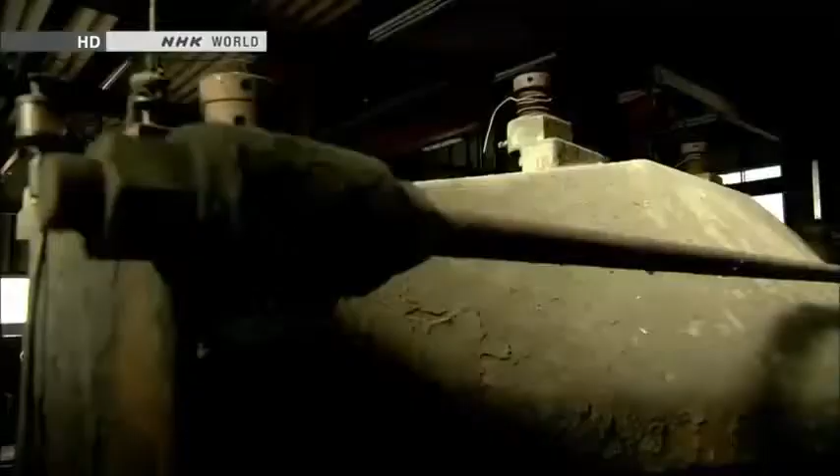In a workshop near Mount Fuji, a curious being has appeared. It's 3.8 meters tall and weighs 4 tons. It is a giant humanoid robot named Kuratas.

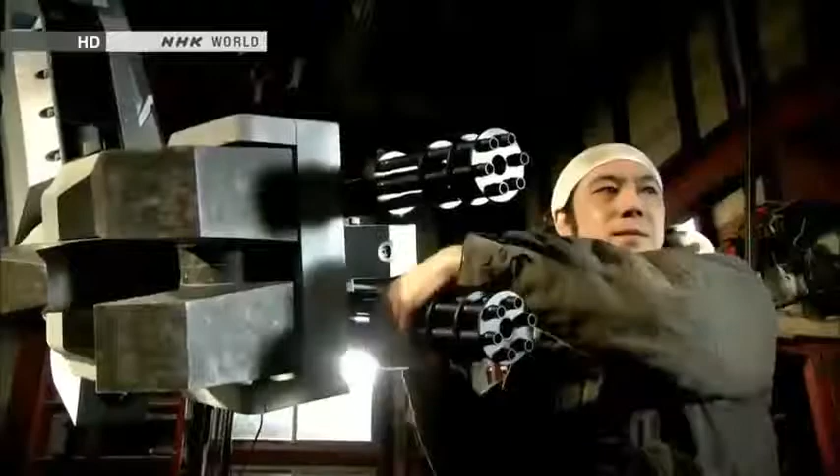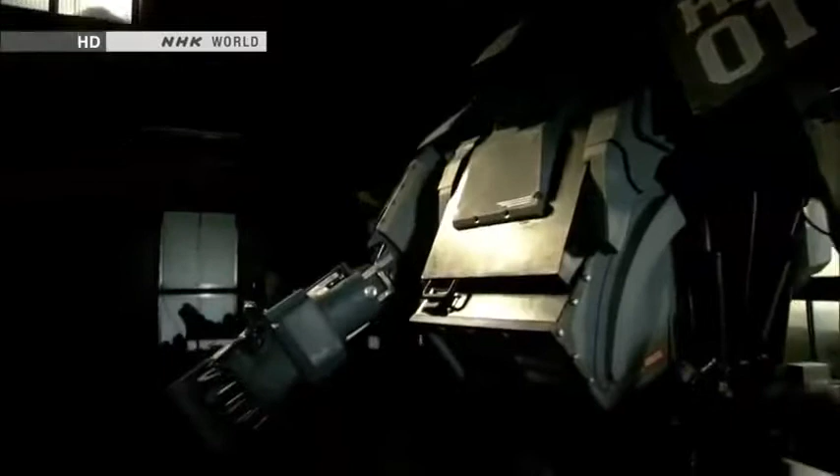Kuratas is a contemporary artist's creation. He holed up here for 2 years, building the robot with input from an expert. He calls Kuratas a work of art, but it's a sophisticated piece of machinery. A person seated inside can control the robot, move its limbs, and grab things. The artist says he was inspired by robots in science fiction tales and animation. That vision sustained him as he worked in solitude.

Things that were once unthinkable are becoming real. How will robots evolve? Well, military applications could be one option. They'll probably become more and more like humans. They could surpass us in strength and ability.

People long dreamed of creating these extreme machines. Now, humanoid robots are here. They think like we do, move like we do, and even sacrifice themselves for us.

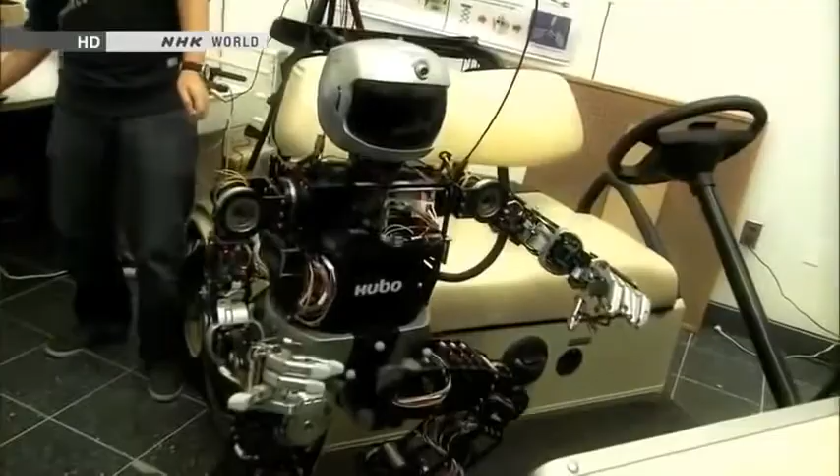We want our robot to change society, because robots must be useful. Electronics and computing, progress in vision systems, there's many pieces of it. We will see much more capability continue to grow.

Since the Industrial Revolution, people have entrusted some jobs to machines. But there may come a day when humanoid robots do much more complex jobs. Then, what will people do?

You'll see more and more robots doing things in society, whether it's manufacturing or service applications or home healthcare applications. The key will be to skillfully divide labor between humans and humanoid robots.

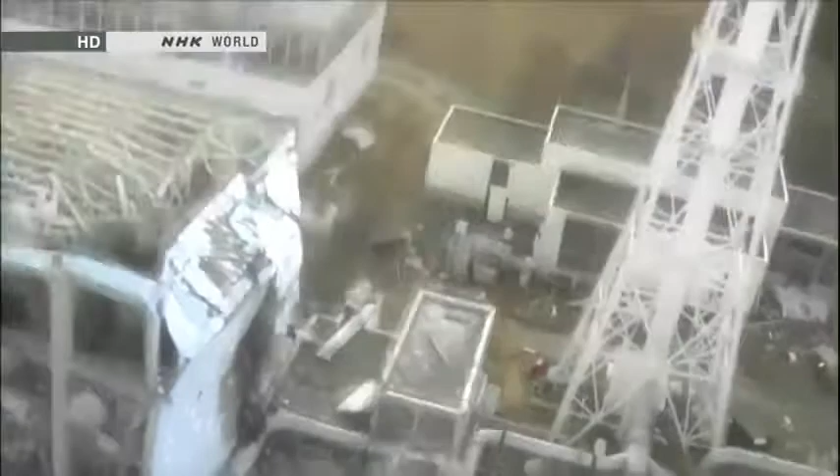The disaster that hit Japan in March 2011 accelerated efforts to develop robots with human traits. The Fukushima nuclear accident left people powerless.

Robots can take over when things become dangerous. They can plow through rubble, climb ladders, even make repairs. People are turning to humanoid robots to handle all of these tasks.

We're eager to launch it soon to end the crisis. By joining forces, we can make a truly useful contribution. Only a humanoid could do it.

The day will come when robots will really assist mankind. The nuclear disaster in Japan sparked explosive advances in humanoids at the front line of robotics development. This program explores the future that's fast approaching.

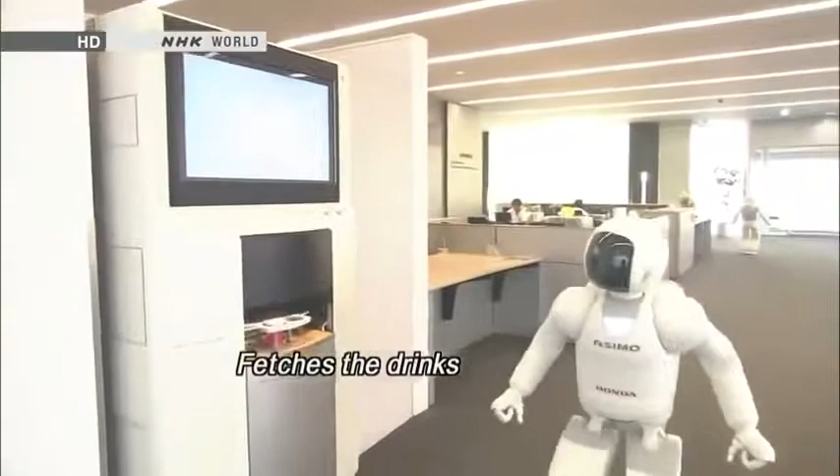ASIMO was created by Honda's research and development subsidiary. We were allowed to film their top-secret robotics laboratory.

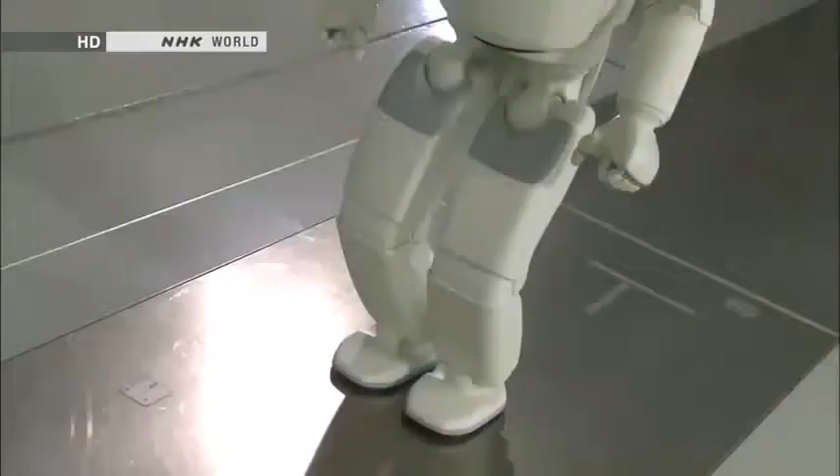Japan is a worldwide leader in the development of humanoid robots. ASIMO is the country's crowning achievement. Engineers continue to make improvements.

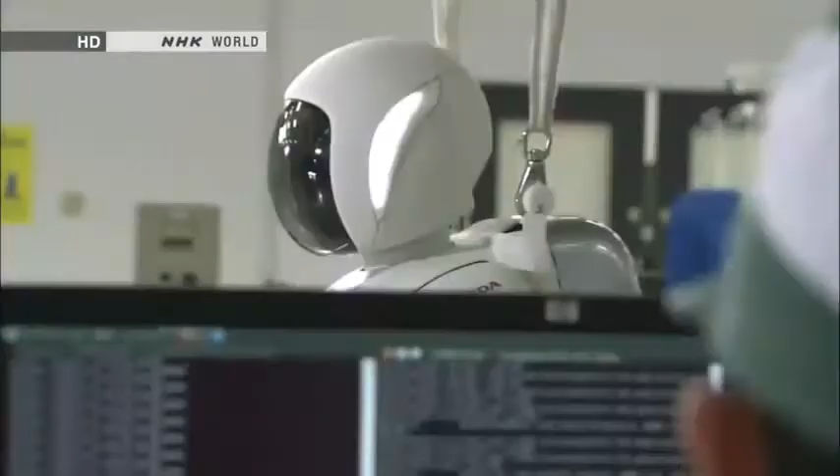ASIMO's most innovative feature is its advanced intelligence. The robot can think and act on its own without human intervention. That's made possible by sensors that replicate our 5 senses.

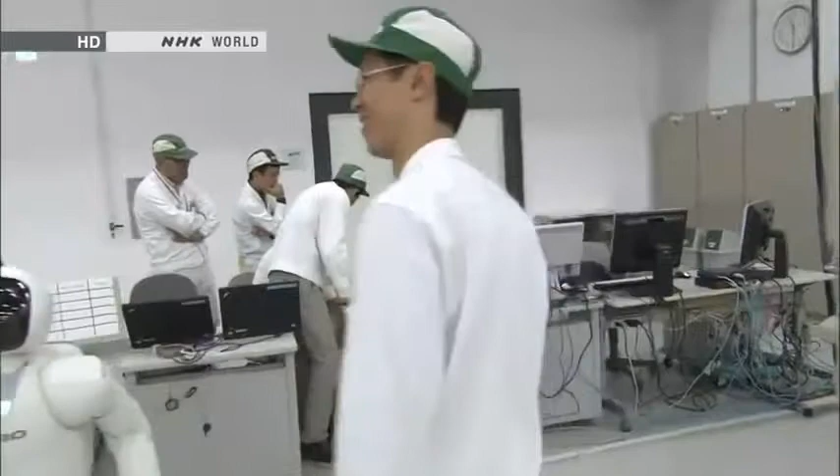ASIMO's head contains 8 microphones. It uses them to listen and engage in conversation. 2 cameras work as eyes. They can detect humans and use stored data to identify them.

A facial recognition problem? I don't think so. Please cover your face.

ASIMO's artificial intelligence analyzes a vast array of information. That's how it understands people's requests and takes appropriate actions.

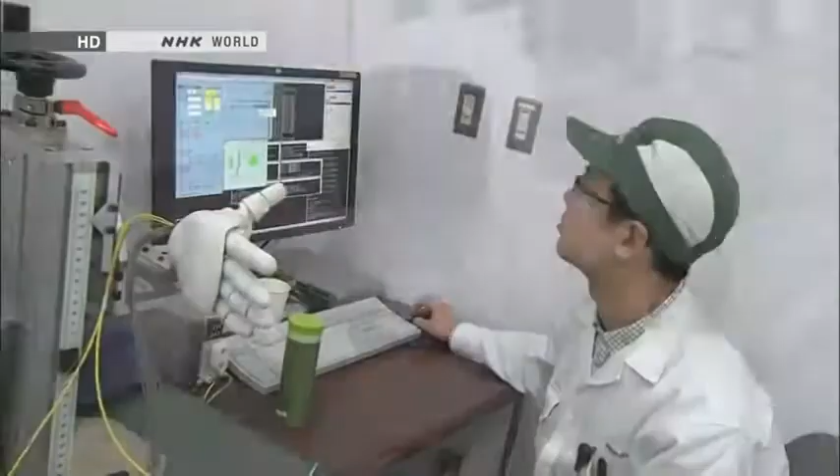ASIMO also has a sophisticated sense of touch. Its fingers can make subtle movements like a person's. Sensors are embedded in the fingertips too. They can gauge the hardness of an object, like human fingers do.

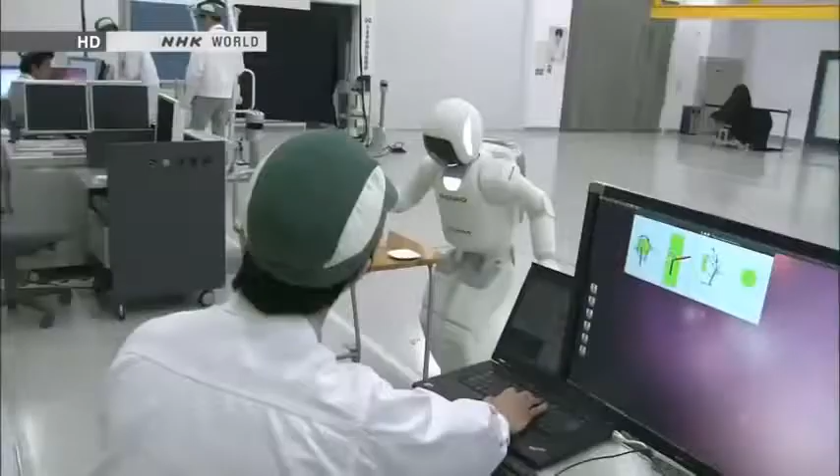Most robots use a fixed amount of strength to grab things. But ASIMO exerts more power to open a tightly sealed water bottle and less when holding a paper cup. Its artificial intelligence uses information from the fingertip sensors to adjust the grip.

The developer's ultimate goal is for ASIMO to be a valuable partner that coexists with humans. The engineers who created ASIMO all grew up watching animated shows about robots, such as Astro Boy, Doraemon, and Gundam. They dreamed of someday making their own.

Satoshi Shigemi is the development team's leader. He has been designing robots for the past 16 years.

From the beginning, we wanted to design a robot that could help people. To realize that dream, we're constantly asking ourselves, what kind of robot would be able to change society, make people happy, and make life easier for people around the world? Our idea is to create a robot that will change how people live. We're working through the technological issues, one by one, in order to reach that goal.

ASIMO's advanced physical capabilities are revolutionary. The robot can walk and run. It can reach speeds of up to 9 kilometers an hour.

For robots, walking is much easier than running. When running, both feet momentarily leave the ground. Balancing in mid-air is no easy task.

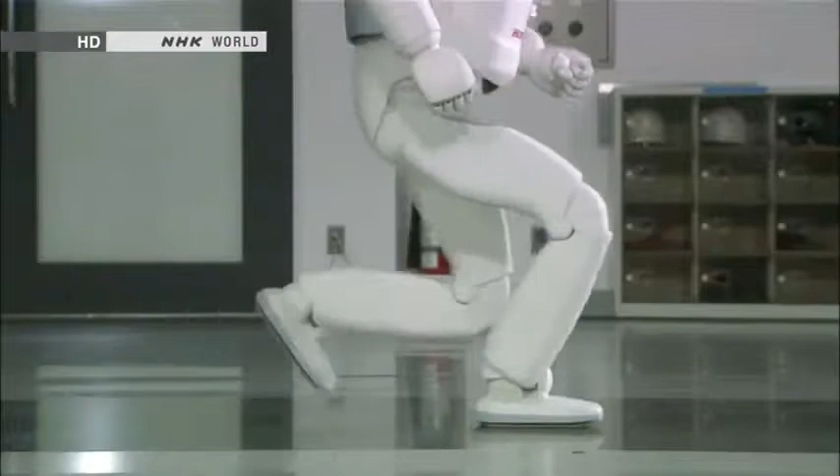Maintaining posture while jumping or floating in the air was a major technological breakthrough. ASIMO leans its upper body slightly forward to maintain overall balance. It goes forward straight in the air.

Sensors in ASIMO's waist measure the robot's angle. It leans slightly to compensate, forward or back, side to side. That's how it stays perfectly balanced in the air.

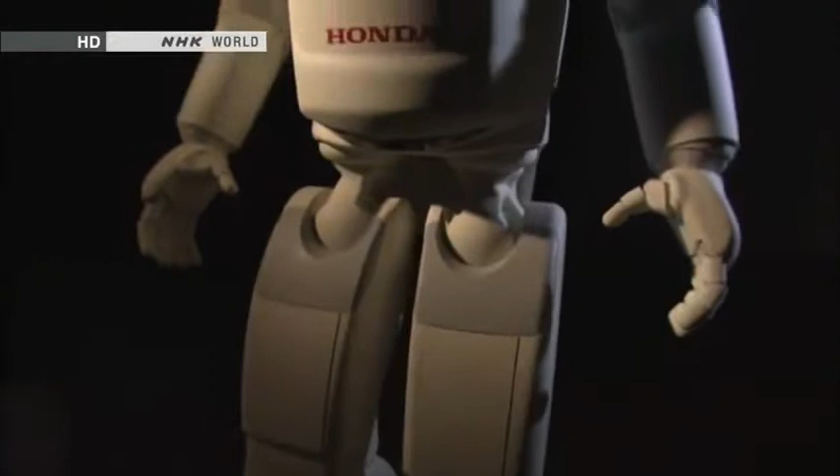ASIMO has been evolving ever since development began in 1986, much like a growing child. But something happened that made researchers realize ASIMO's real-world limitations: the accident at Tokyo Electric Power Company's Fukushima Daiichi nuclear plant. The damaged reactors released radioactive substances, making it difficult for humans to deal with the crisis. People needed something that could confront the dangers and bring the plant under control.

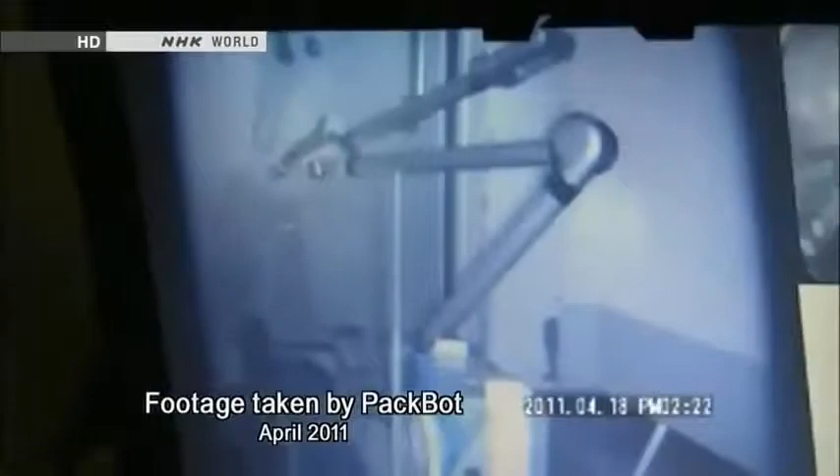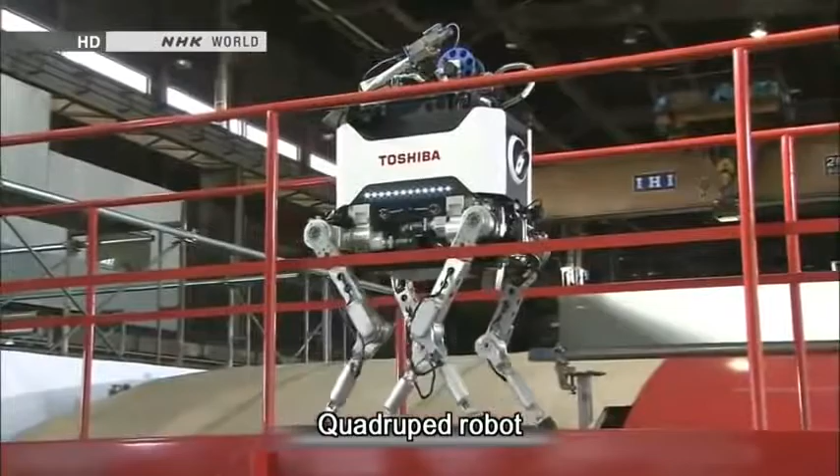Robots. Japanese officials sent a request for robots developed by the U.S. military. The robots were sent to Fukushima in April 2011. They recorded images inside the damaged reactors. Since then, a variety of Japanese robots have been enlisted as well. Robots have proven to be useful, but 2 years after the accident, they're only used for inspections. They're not able to do all the work of humans.

What about ASIMO? Right after the disaster, people flooded Honda with phone calls and emails asking the company to send ASIMO to the Fukushima plant. But ASIMO wasn't up to the task. It could move nimbly over an office floor and other flat surfaces, but large vertical gaps and obstacles were a different story.

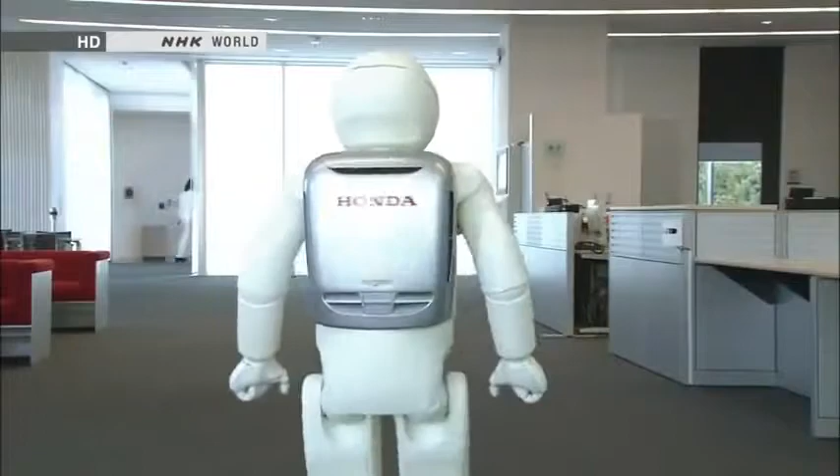We heard from many customers. We ourselves regretted that ASIMO couldn't be of help. It was obvious that the ASIMO we had built wasn't ready for real-life action. We realized right away that we needed to make something different, something new that could offer immediate assistance.

Honda wasted no time. Company officials offered to create a robot free of charge to assist TEPCO in the recovery. TEPCO accepted. Officials asked for a robot that could open or close valves inside the nuclear plant. We wanted to flush out radioactive materials that remained inside the pipes and bring down radiation levels in the facility. That was our first goal. Unless we opened or closed the valves, the area would remain highly radioactive, and that would prevent workers from entering the facility, and impact the entire decommissioning schedule.

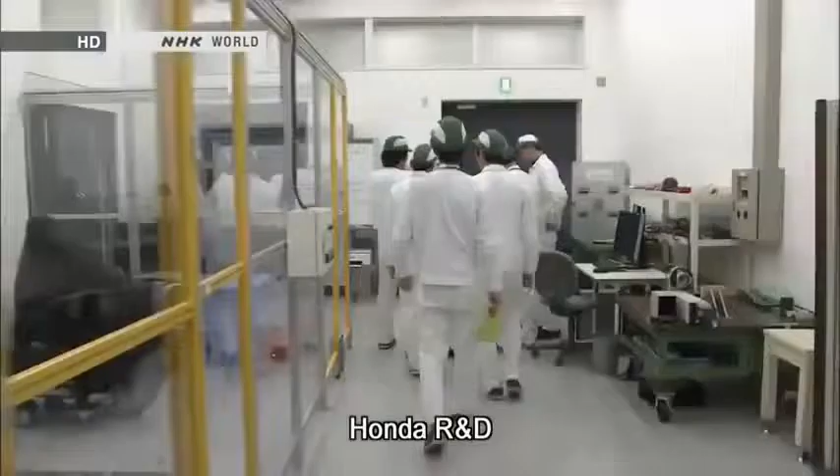How many valves are there? Each unit has from several thousand to tens of thousands of them. In July 2011, 4 months after the accident, Honda began designing a robot for use at the nuclear plant. Members of the ASIMO team were put in charge of the project. A humanoid robot would take too long to build, so engineers focused on making a robot specifically for operating valves.

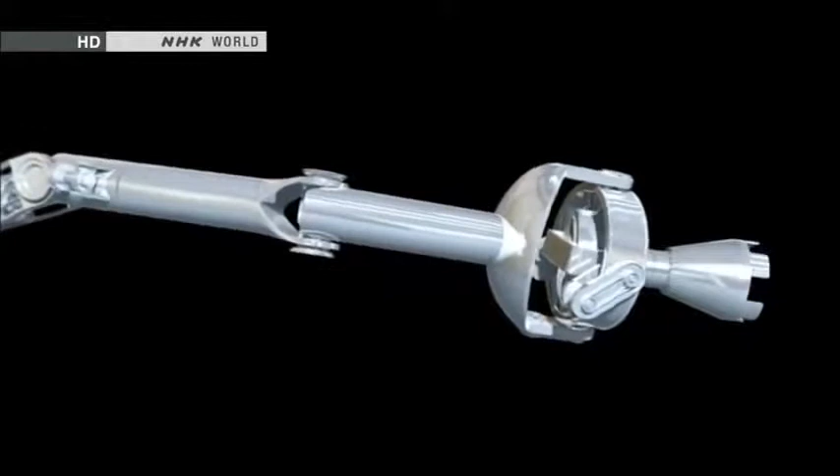ASIMO was crucial to their efforts. Its ankles employ advanced balancing technology. Developers reasoned that using it would allow the new robot to work inside rubble-filled reactor buildings. The team worked exceptionally fast, completing a prototype in just 4 months. They turned ASIMO's leg into an arm for operating the valves. Even when the base moves, the arm remains steady.

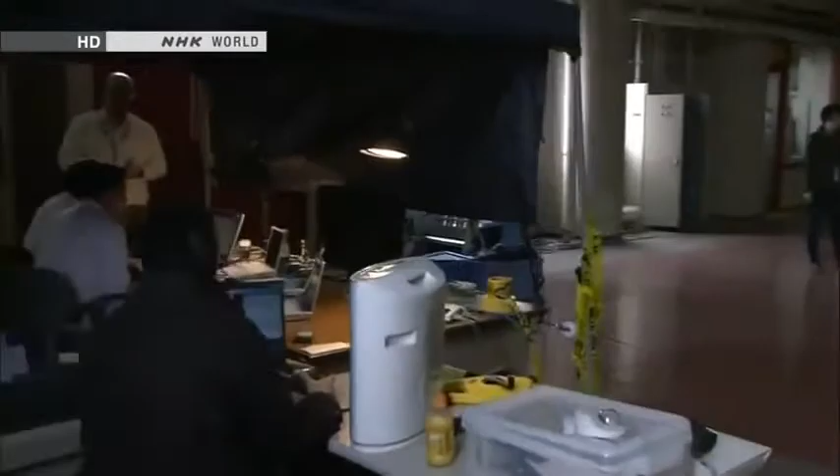So far, so good. Officials from TEPCO evaluated the prototype at the National Institute of Advanced Industrial Science and Technology. The government-backed group for cutting-edge research contributed to the development effort. A TEPCO official couldn't take his eyes off the robot's movements. We may be quite demanding. That's okay. We might be quite direct. The test is designed to replicate conditions inside the nuclear plant.

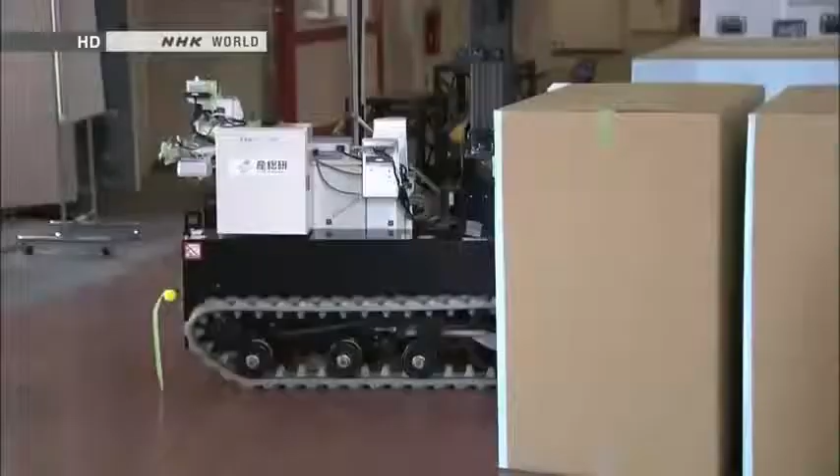The robotic arm is remote controlled. Testers send the arm toward one of the valves. There are a number of unknowns, including the condition of the valves—they may have rusted since the accident. A valve might break if the robot applies too much force, or it might not budge at all. The robot uses just the right amount of force and turns the valve on the first try. It's passed the test.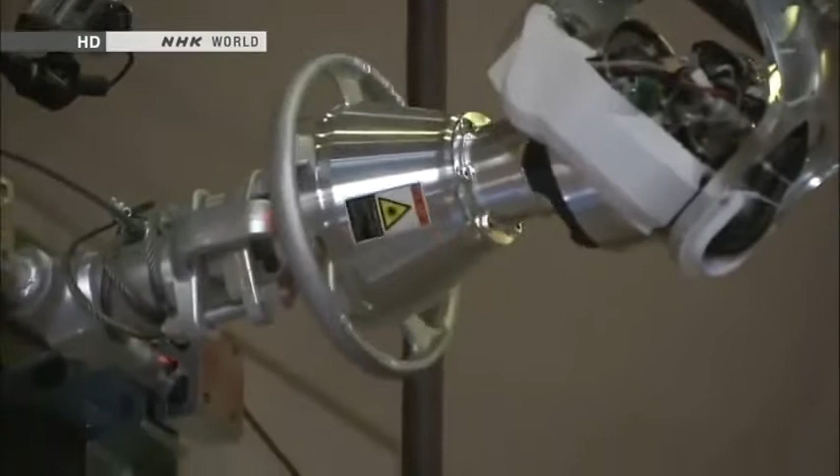This robot can do more than inspections. It could help in the recovery effort. From what we've seen, the robot seems near perfect. We want to use it as soon as the need arises. It's important that we quickly do what we can to make that possible.

The Fukushima accident also encouraged U.S. developers to design emergency response robots. Department of Defense officials have spearheaded the effort. Before, they had shown little interest in humanoid robots. Now, they view them as vital for disaster response. The architect of the new strategy is Gil Pratt of DARPA. He oversees funding for leading-edge research at the Department of Defense.

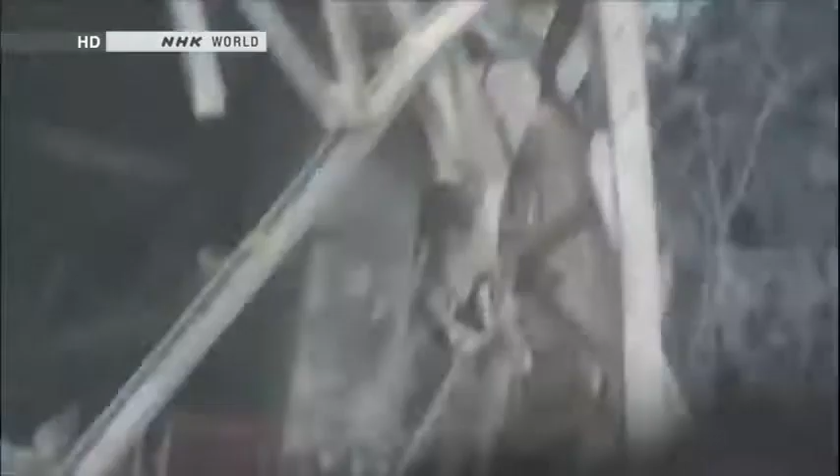There are many aspects of disaster response in Fukushima that inspire people in robotics to work on new capabilities. If they were able to take action during those first 24 hours, then the first reactor maybe would not have blown up in an environment that is too dangerous for a person to do.

What's important to us is that the robot is compatible with human environments, compatible with human tools, and also compatible with human operators without special training. As a result of that, the easiest form that comes to mind is the human form.

DARPA is backing the development of a humanoid robot for catastrophes, such as nuclear power plant accidents. This company is leading the development work. It has already built several military robots. Okay, I'll show you the current status of the robot.

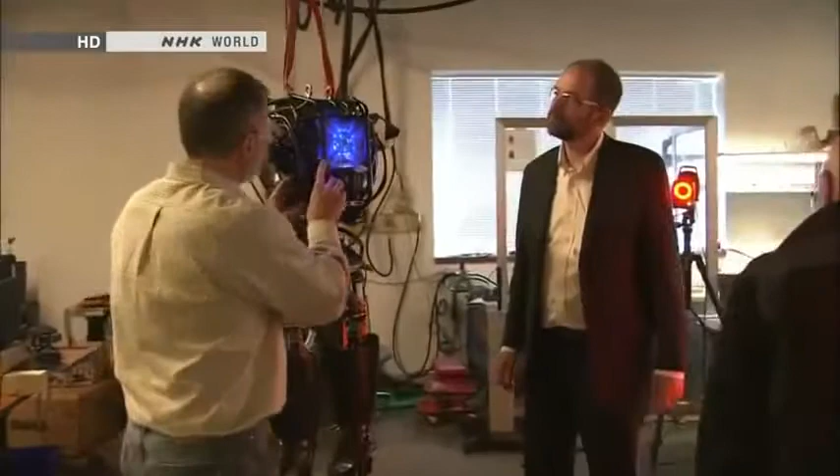This is the first American-made humanoid robot for disaster response. It's called Atlas. Before, U.S. designers had focused on robots with specialized functions.

Why the sudden interest in humanoid robots? Traveling over debris, prying open valves, using tools for repairs - performing multiple tasks like these is impossible for specialized robots. Crises also require robots that can navigate doors and stairs. Humanoid robots are ideally suited for such situations.

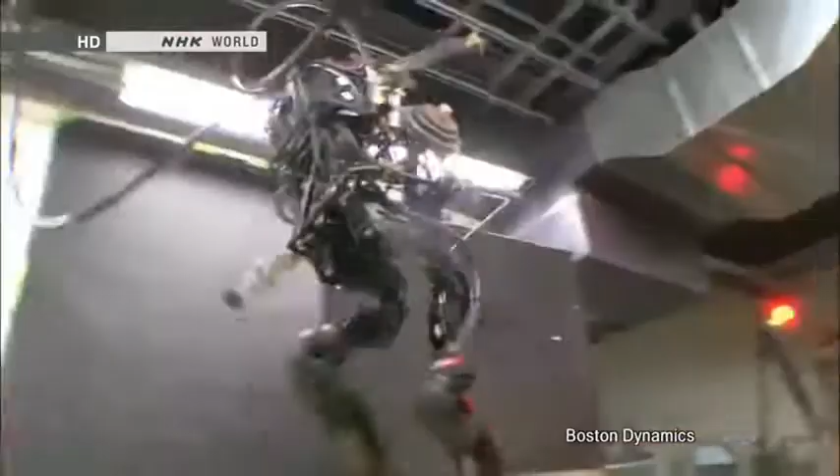Tests of this prototype were going smoothly. It can easily climb stairs and jump from a height of nearly 1 meter, and can negotiate obstacles using its arms and legs. It can already handle more demanding environments than Asimo can.

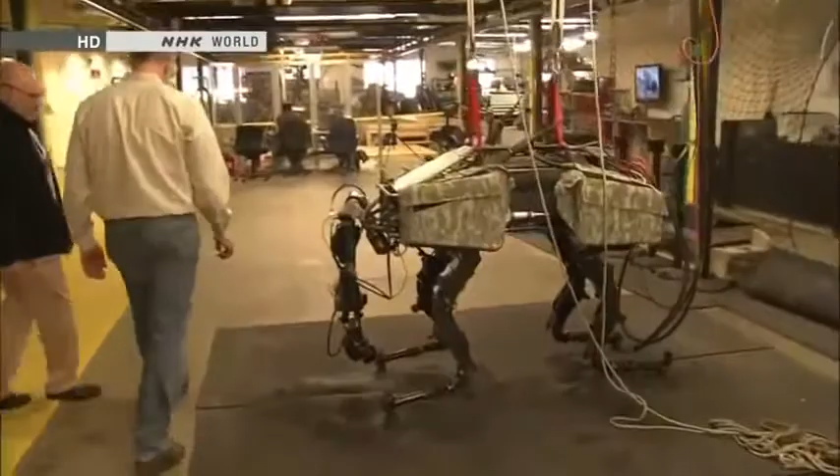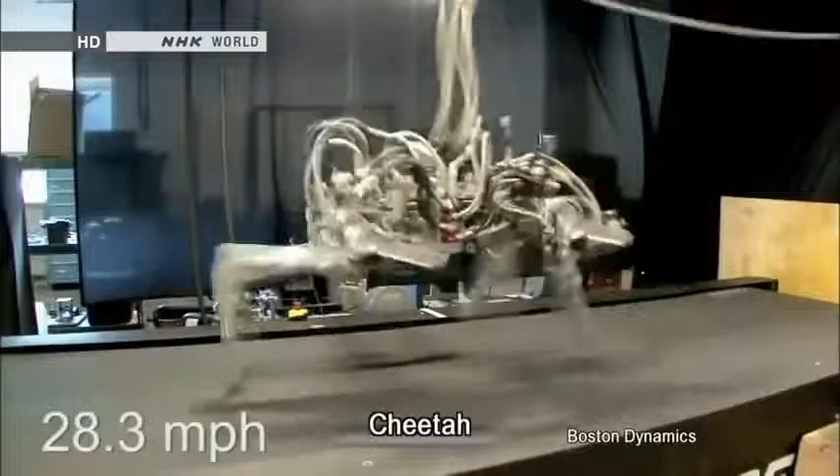Atlas is loaded with technologies originally designed for military robots. A quadruped robot called Cheetah can race through a battlefield at 45 kilometers an hour. LS-3 is for transport - it can carry heavy supplies for soldiers.

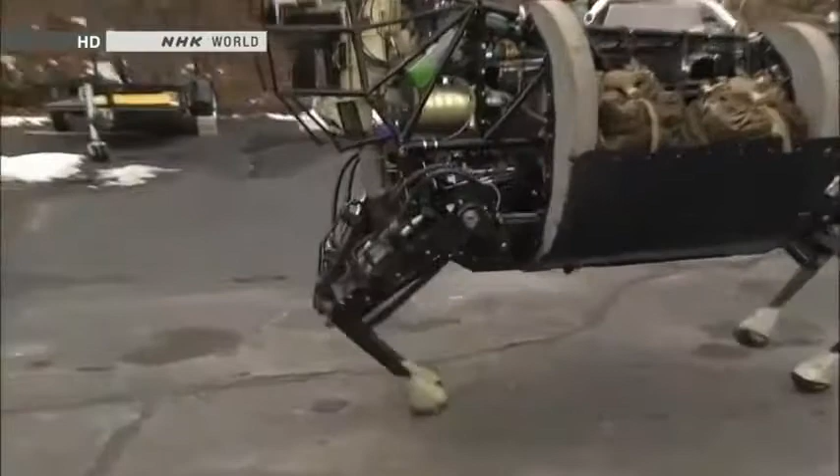The ferocious-looking robot gets its strength from a powerful hydraulic drive system. A hydraulic device can be small, yet quite strong. The black cables convey hydraulic power to the legs.

That generates the brute force required for harsh conditions on the battlefield. A web of hydraulic cables covers Atlas's body, forming a muscular suit of armor for clearing debris.

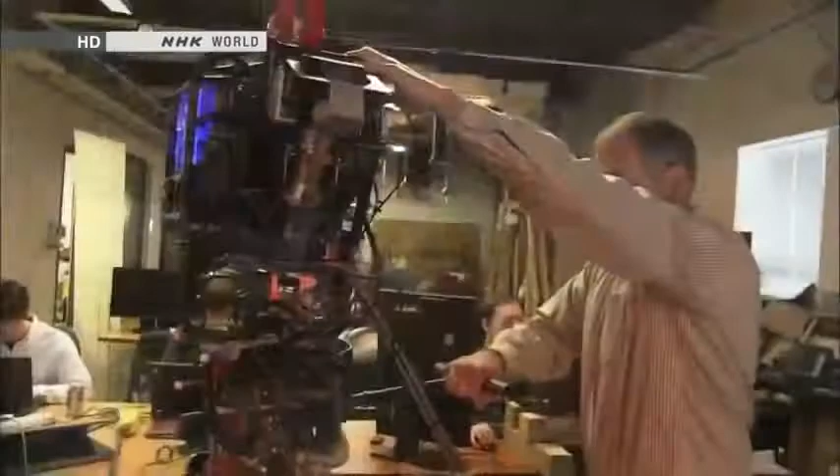Another important technology comes from military robot engineering. This machine's joints have a wide range of motion, allowing for flexibility that humans can't achieve. Atlas's joints are capable of moving in 28 different ways. Atlas can crawl through narrow spaces and withstand sudden shocks.

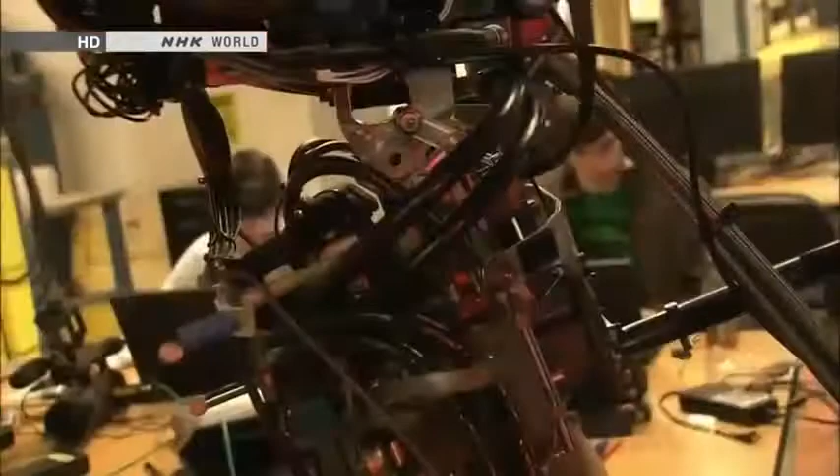But then we have the knee. This has 3 in the hip, just like us. This way, and then this way. I am very impressed with the number of degrees of freedom. It will be able to do these human-compatible tasks without a lot of the limitations that other robots have.

Engineers will combine Atlas's rugged body with sophisticated artificial intelligence that's almost near completion. They aim to complete the robot by December of next year.

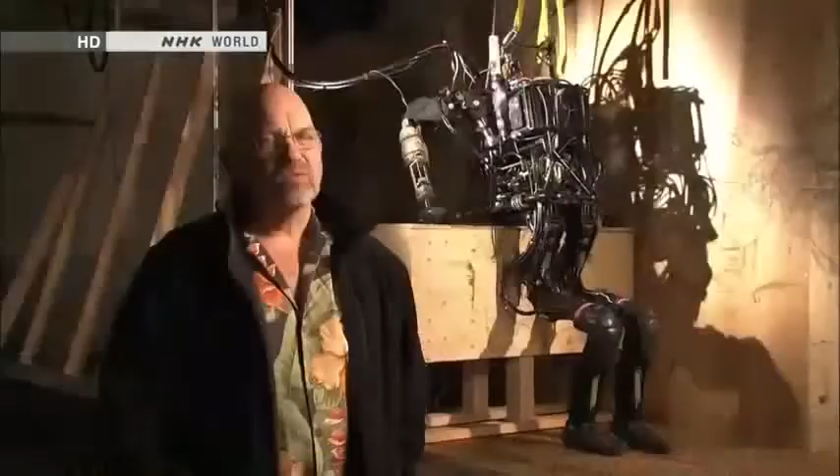One reason you see humanoid robots is because there's some people working who are really interested in robots as an entertainment thing or as a performance thing. I think that's different. We're much more interested in basic capabilities for emergency response, rescue. So I don't think Asimo has been designed to do those things yet.

U.S. engineers stepped up their efforts to develop humanoid robots after the nuclear accident in Japan. Japanese researchers are embracing the same mission. In November 2012, robot engineers from around the world gathered in Osaka for an international conference on humanoids.

Gill Pratt from DARPA was one of the participants. He came to invite engineers to join a project sponsored by the U.S. Defense Department. Okay, March 11th.

After 24 hours, if only a robot had been there to go and open that valve, the entire disaster could have been averted. But we didn't have one, and furthermore, we didn't have anyone that could do the job. So shortly afterwards, we actually started planning the DARPA Robotics Challenge.

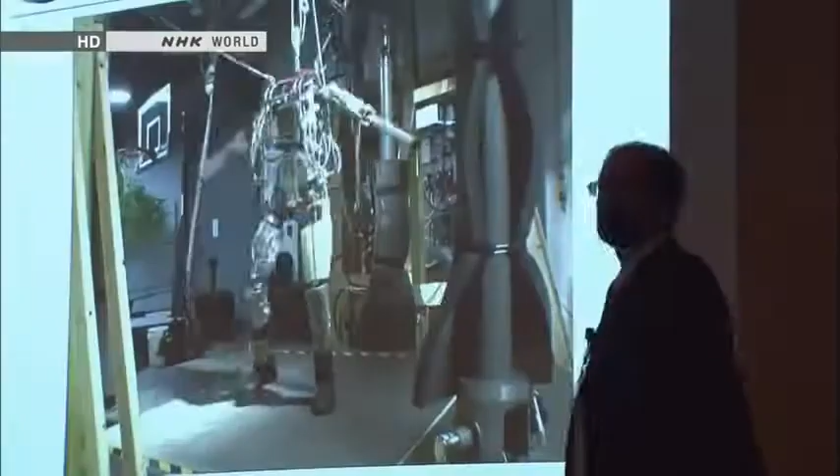They have 2 degrees of freedom, not 1. The Robotics Challenge is a competition to develop emergency response robots for major disasters like Japan's.

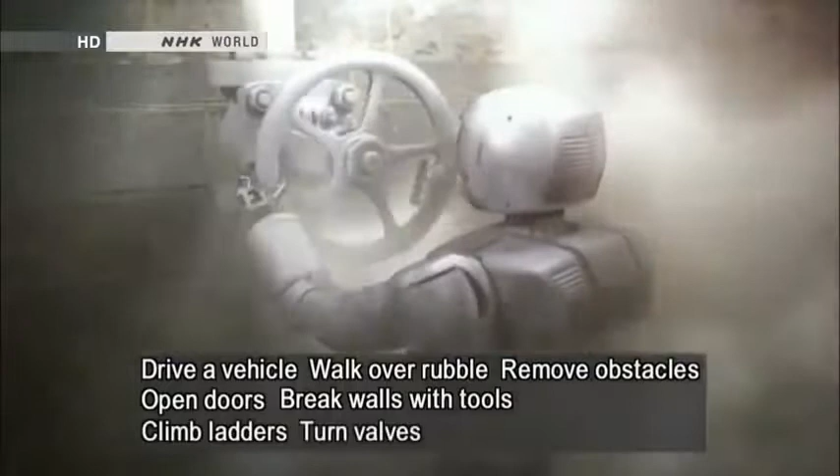The challenge consists of 8 tasks: driving a vehicle to approach a disaster site, walking over rubble, removing obstacles, opening doors, using tools to break down walls, climbing ladders, turning valves, and making repairs.

A single robot must complete all 8 tasks. The development period is 2 years. DARPA will provide contestants with funding of up to $4 million.

DARPA has received over 100 proposals from research groups worldwide, including renowned organizations like NASA and MIT.

Japan is at the forefront of humanoid robotics engineering, yet its researchers hesitated to throw their hats into the ring.

So actually, to me, it's difficult not to see that some of the results of the DRC are going to be used to advance, as you say, advanced military technology. The DRC is about developing robots that I believe wholeheartedly are completely impractical for offensive military purposes. Will the technology we come up with find its way into military systems? Probably yes. But I guarantee you that if you work on a robot for healthcare, there's a chance that technology will also find its way into military systems.

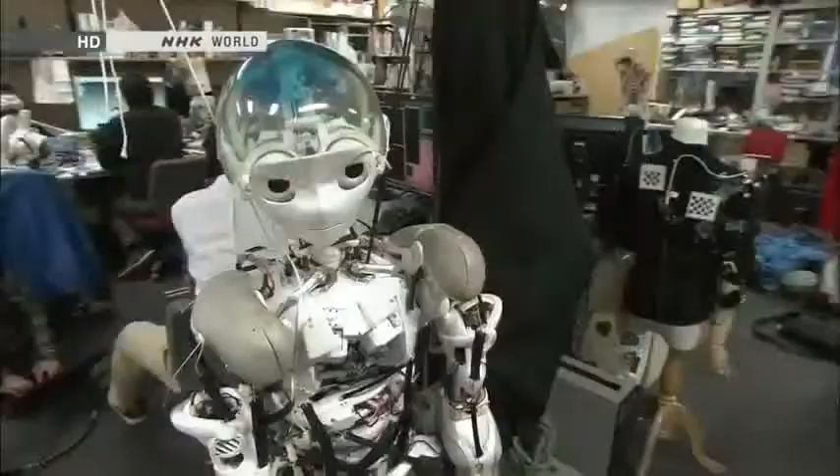The members of one Japanese research institution wanted to take part in the competition. They worked at the University of Tokyo's robotics lab. Researchers there, along with those at Honda, are global leaders in robotics engineering. But they faced a major obstacle to competing: the university bans military-funded research.

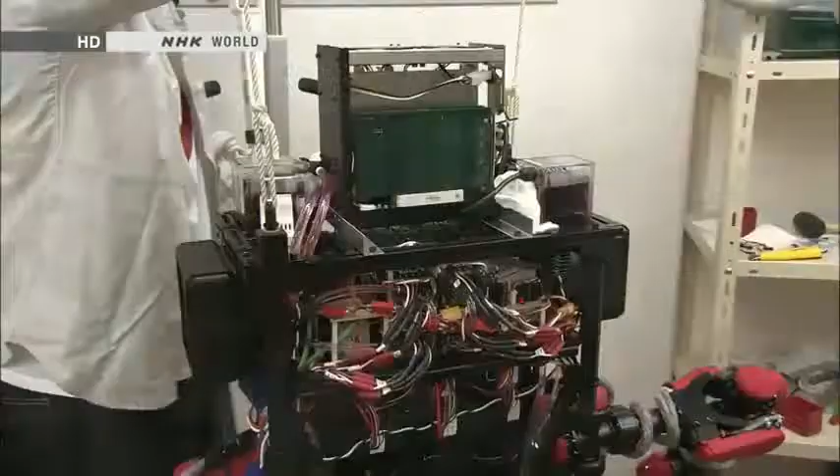Three researchers made a decision: they told the university they were leaving. Then they decided to set up a venture company and enter the DARPA Robotics Challenge. They couldn't shake the feeling that they should leave their quiet university lab and help resolve the nuclear crisis.

Six months after launching their venture, the team had just completed a prototype with help from university graduates. Its long arms can exert 10 times more force than those of conventional humanoid robots.

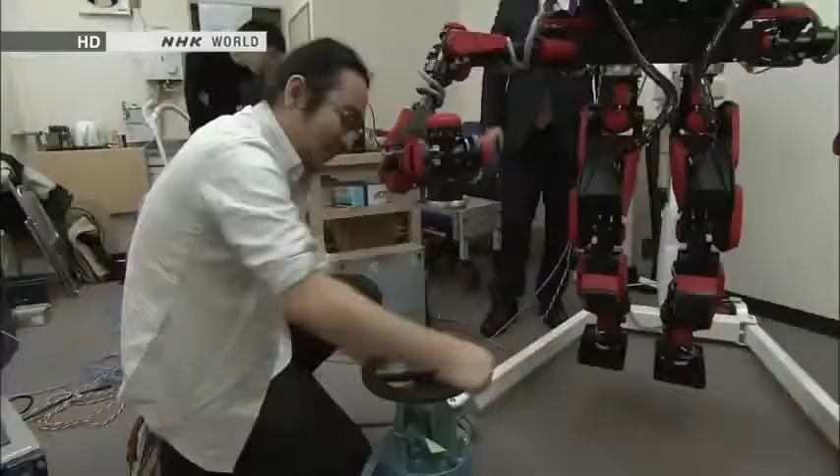It's too tight to turn with one hand. It can easily turn a valve that's too tight for a person to turn.

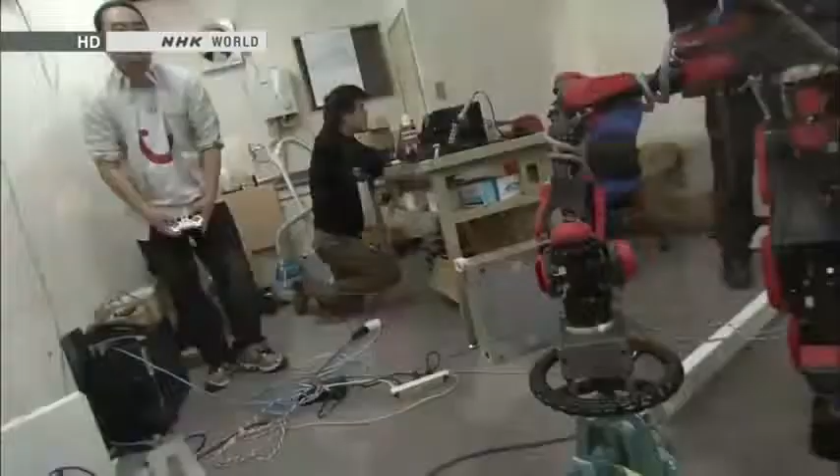The strong force comes from a large electric current that pushes the motors to their maximum limits.

A reddish fluid circulates through the robot's body. The fluid serves as a coolant that keeps the motors from overheating. This cooling system should enable the robot to perform hours of grueling work at disaster sites.

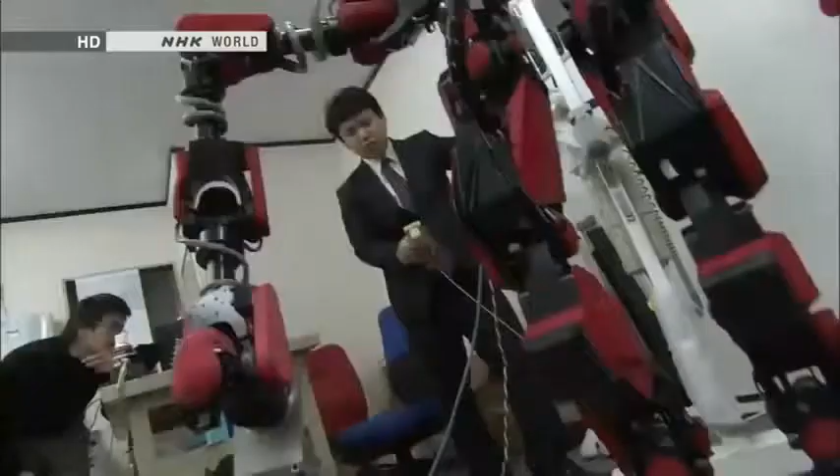The time has now come for the developers to apply their years of research to the real world. A nuclear crisis has happened here in Japan. Radiation is escaping. Researchers in every field must wonder at least once if the technology they've been working on could help resolve the crisis. By joining forces, we can make a truly useful contribution. It's with this in mind that we decided to enter the competition.

One country is quickly catching up with Japan in humanoid robotics: South Korea. KAIST is a government-funded lab for the advancement of science and technology. Researchers there were among the first to express interest in DARPA's Robotics Challenge.

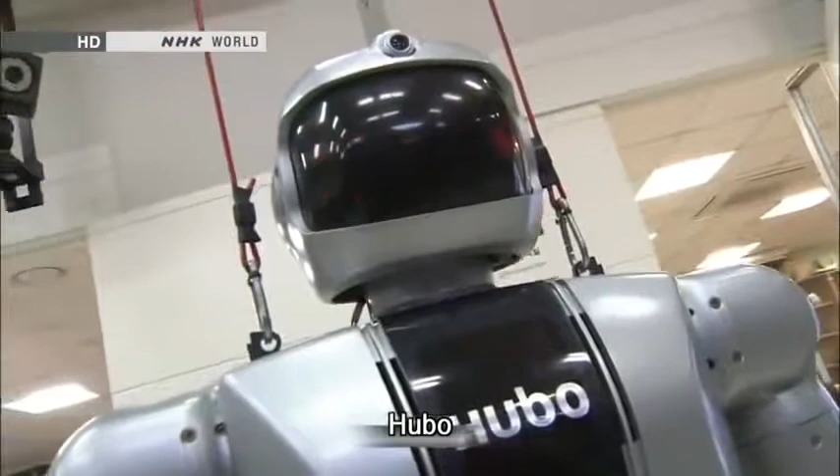This humanoid robot is called Hubo. It's modeled on Asimo, which Honda spent 14 years developing. Hubo was built in just 5 years. Hubo deftly manipulates its hands, and it's also good at dancing. Its moves look just like Asimo's.

Hubo has been undergoing a major upgrade ahead of the competition. It can now bend backward at the waist while walking to handle all kinds of environments. It can quickly pick up tools. The tests were going well.

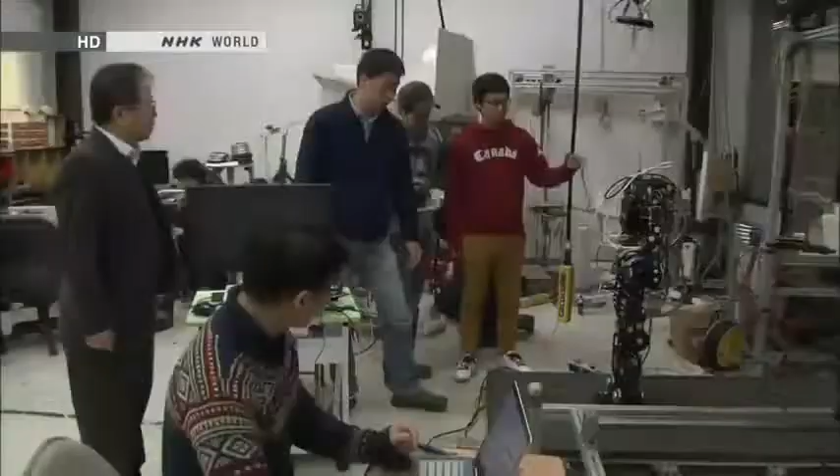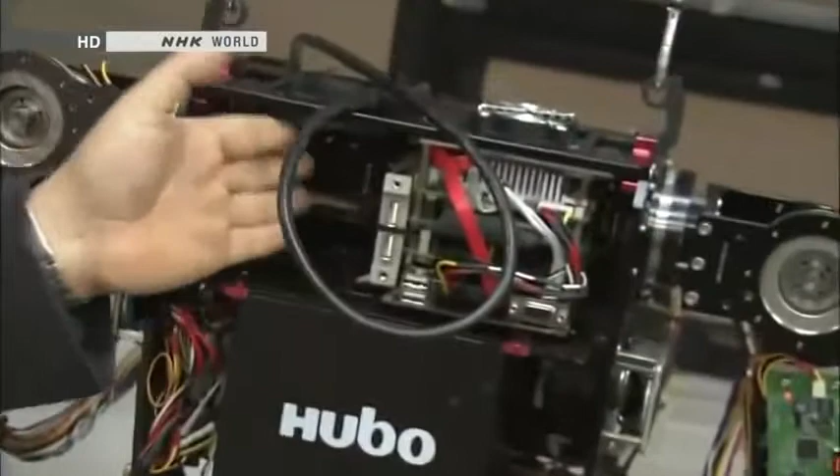People have always compared Hubo to Asimo. Engineers now had a strategy to get ahead of the Japanese developers: they decided to publish certain details about Hubo's design and pursue joint development with researchers at other institutions. One could say that this space inside Hubo's chest captures the heart of their thinking. It's empty now, but this is where artificial intelligence will be installed. It's removable.

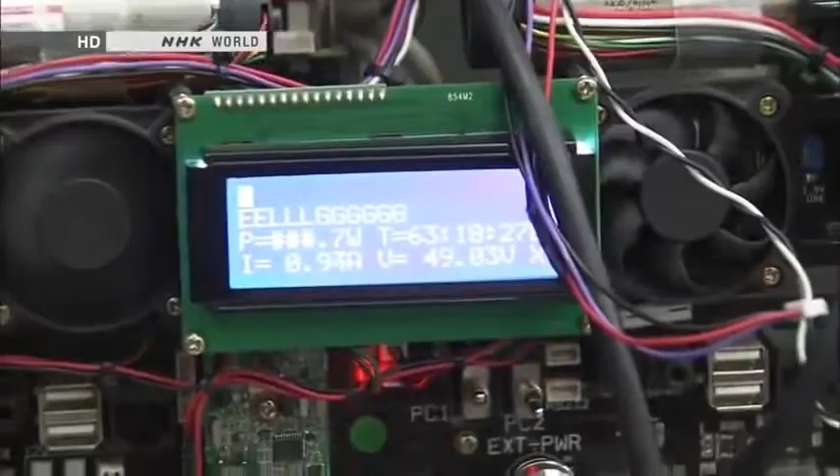Hubo does not yet possess artificial intelligence. Its motions are as sophisticated as Asimo's, but Hubo's movements are all pre-programmed. U.S. universities that lead research into artificial intelligence will develop a brain for Hubo. The stage has been set for a joint U.S.-South Korean team to compete in the DARPA Robotics Challenge.

Sharing is the key to making technological advancements. That's true in South Korea and in other places too. Research shouldn't be confined to one place. People developing humanoid robots elsewhere are too close-minded.

Researchers at Honda were also invited to enter DARPA's competition, but they declined. Their energies were focused on designing a robot to tackle Japan's nuclear crisis.

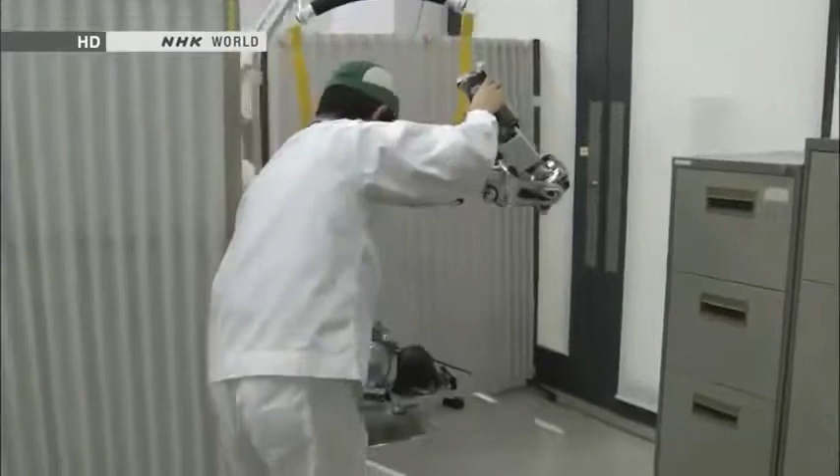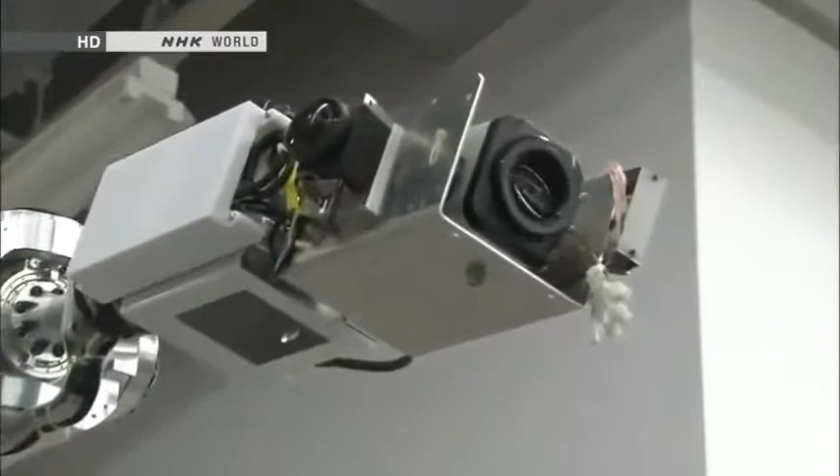Nearly a year has passed since Honda's robotic arm passed evaluation tests, but the device has yet to be deployed to the nuclear disaster site. That's because officials at TEPCO requested a change in specifications. Engineers have replaced the valve-turning hand at the end of the arm with a camera.

TEPCO had changed its plan. Officials decided to put priority on assessing conditions inside the plant's facilities. They said it was too early to have robots work on valves. There wasn't even a recovery plan in place when we were working out the valve manipulation tasks.

Confusion also prevailed at the site. We were expecting valve work to begin 2 to 3 months after the disaster. But the timing has ended up being later than what we'd assumed, 1 month into the crisis.

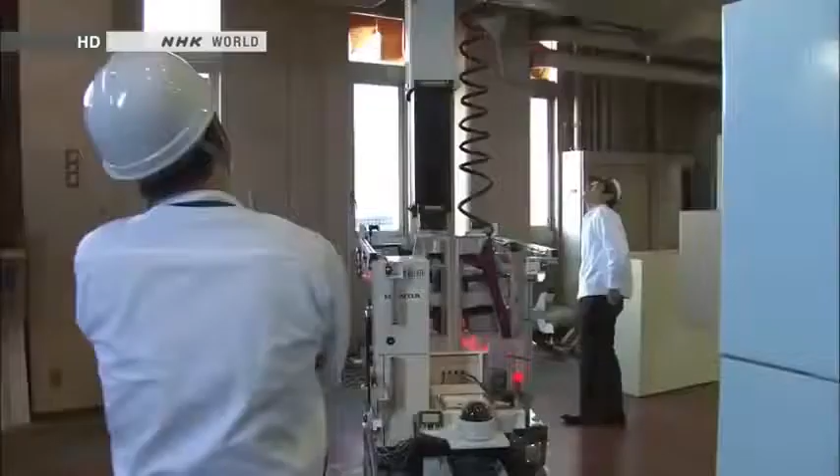The robotic arm will soon be sent to the accident site. It will provide the first images filmed from high up.

The robotic arm was not the end of Honda's efforts. Its engineers had another secret mission. They would develop a new humanoid robot, an updated version of Asimo for use in disasters.

The site where the Fukushima disaster took place is dark and off limits to humans. Only a humanoid robot with both intelligence and motor skills could climb over the debris, get to the accident site, and perform the work of people. In other words, a robot like Asimo.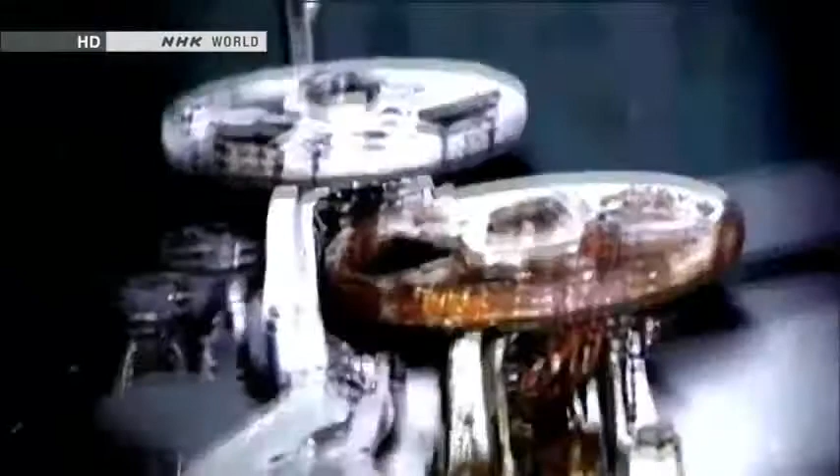Let's use our skills to make a humanoid robot that can tackle disasters. Asimo's engineers were united by this idea. The robot they envisioned would not only walk, but also use its arms to crawl, using every means possible to reach its destination.

A dramatic update would be necessary. A disaster reduction robot would be useless if it couldn't get to the site. It's important to get to the scene no matter what.

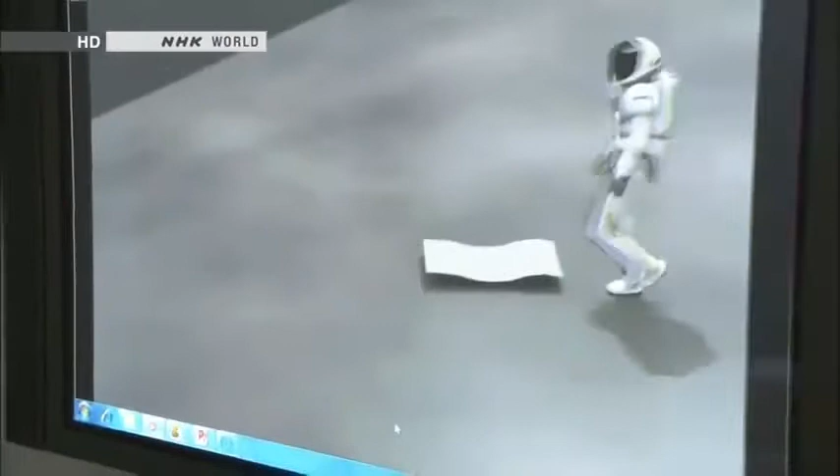Disasters create all kinds of debris that crumbles easily or breaks when stepped on. It's because it's dangerous that robots replace humans. That's what makes them valuable. A robot that couldn't get to the scene would be totally useless.

As we saw in the Fukushima Daiichi crisis, the bottom line is that robots can stand in for humans in places that we can't go to, or that are too dangerous. I am committed to delivering what's needed, when needed, in the shortest amount of time.

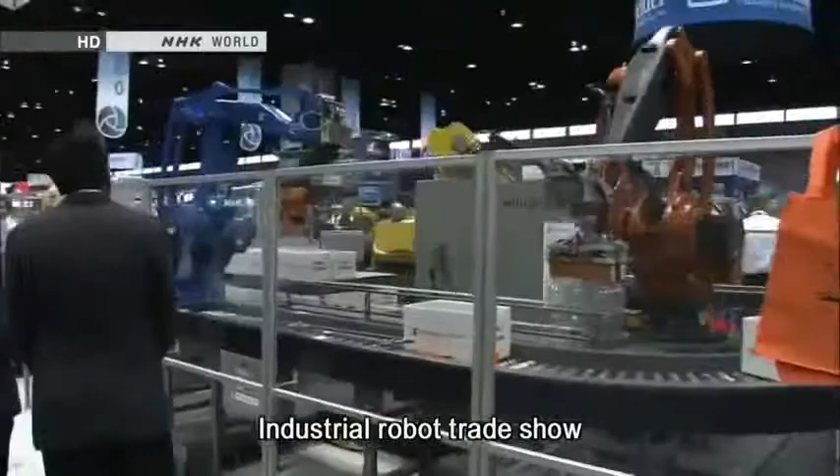One of the largest trade shows for industrial robots took place in January. Global manufacturers displayed their latest models. Companies are developing more and more two-armed humanoids for industrial use.

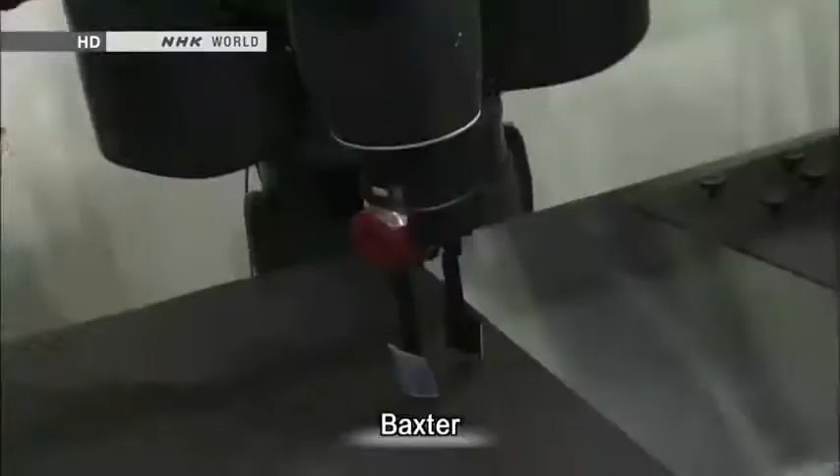One new product at the event caught a lot of people's attention. Baxter was created by the inventor of a best-selling cleaning robot. It's equipped with sophisticated artificial intelligence.

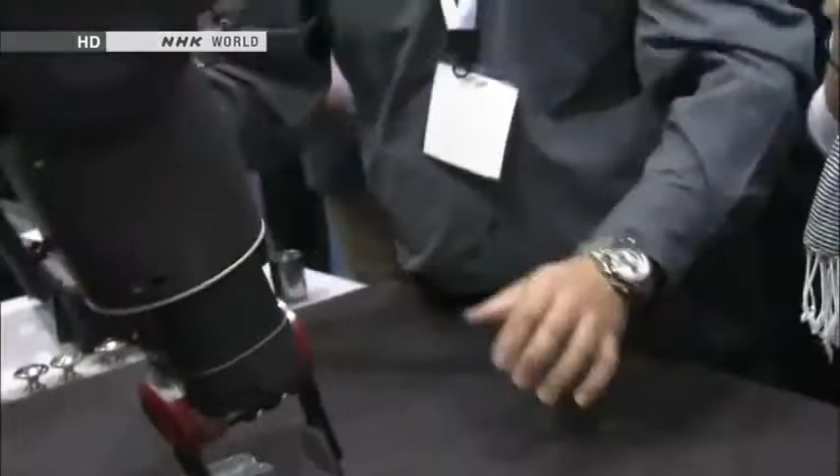Baxter is designed to work side by side with people in factories and other settings. The robot's most unusual feature is its ability to master a task in a matter of 5 minutes. All that's required is step-by-step manual instruction; no complicated programming is needed.

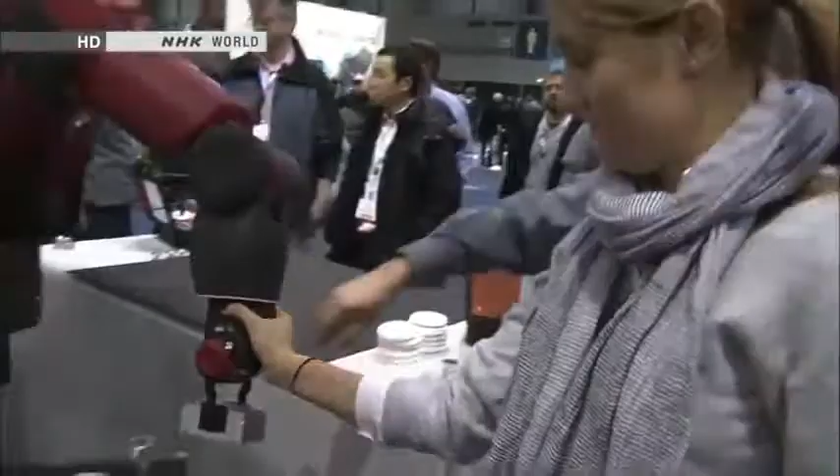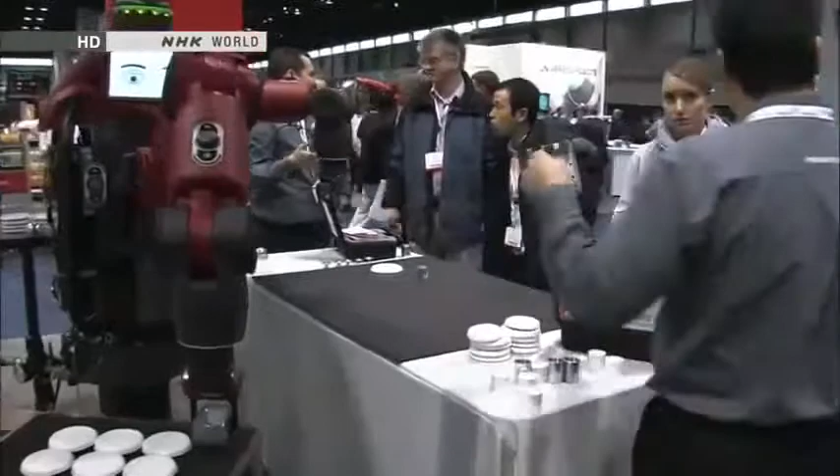The expression on the face on the LCD screen shows whether or not the robot has understood the task.

Baxter costs $22,000, a bargain for a humanoid robot. The maker says buyers can recoup their investment in several months and slash labor costs.

I'm very impressed with it. I work for a small manufacturing company, and we have some older employees who are looking to retire, and there are some tasks that Baxter could do for us very effectively. Plus, it would be cheaper than employing a person. It's not going to get tired, it's not going to need to stop. It'll keep running while everybody else is taking their lunch.

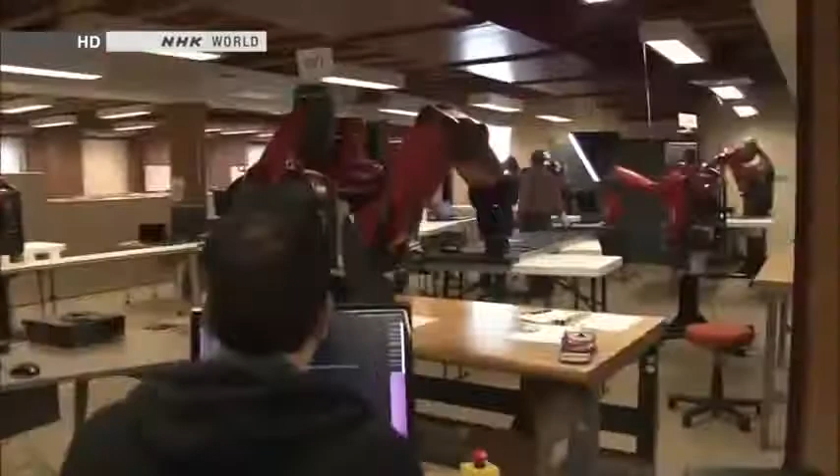The Boston-based manufacturer has a flood of back orders. Officials say someday Baxter will work at places like coffee shops, taking orders and grilling burgers. Eventually, they expect to have 500,000 U.S. customers.

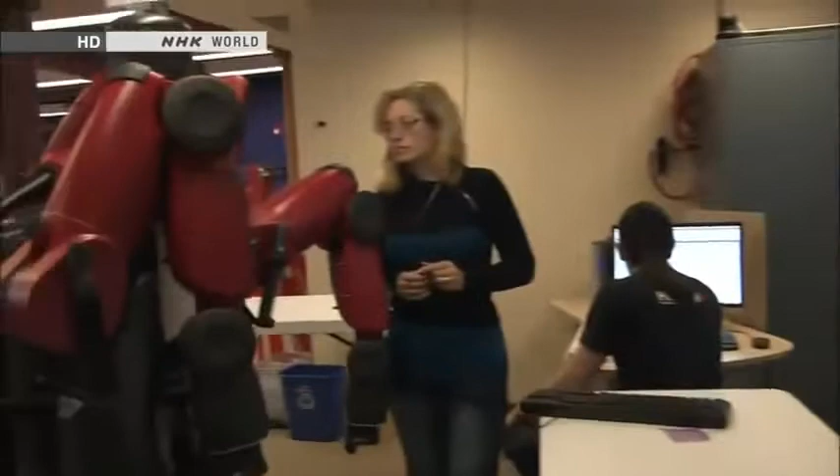Today we're focused on manufacturing, and there's a very big opportunity in manufacturing, but there's lots of other places that a robot like Baxter could go. We had the Industrial Revolution at the turn of the last century. We've just gone through the computer revolution, effectively at the turn of the most recent end of the century. We are now into the robot revolution.

Will people and robots someday compete for jobs?

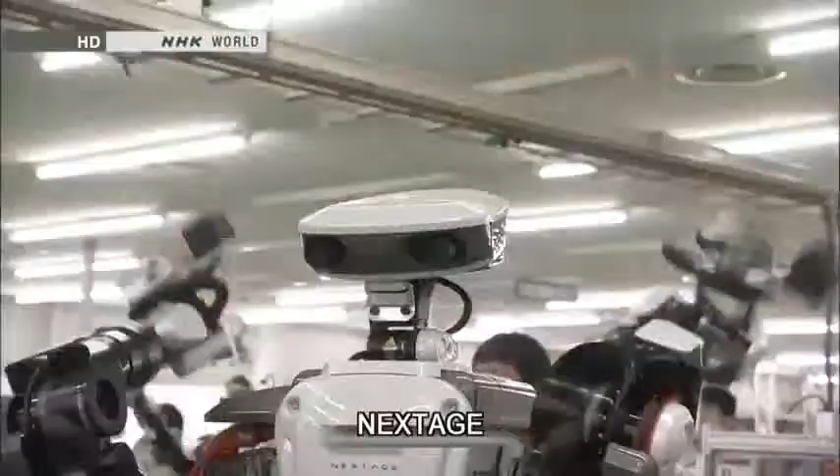At 8:30 one morning, a group of new employees takes part in daily morning exercises. They are 13 humanoid workers called NEXTAGE. This company began using the robots in earnest last year.

They have 2 eyes and are just like humans. They're cute!

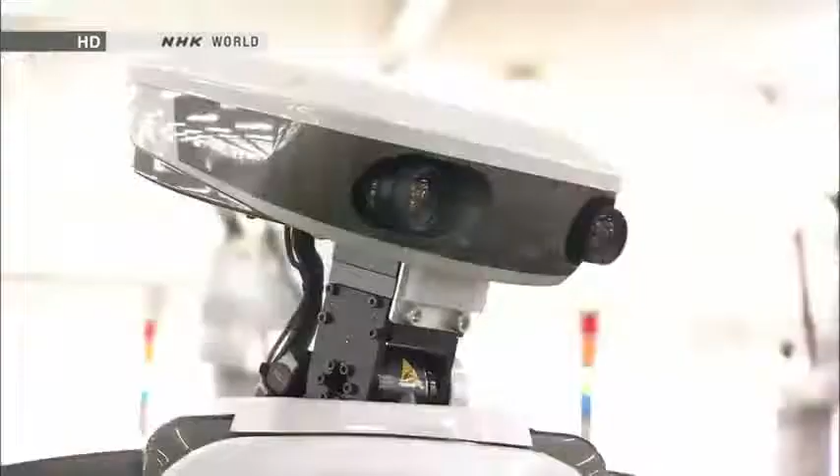This factory manufactures money sorting machines for cash registers. The humanoids work on a production line that was previously manned entirely by humans. The robot visually confirms the parts set in place by a human worker, then it begins its task.